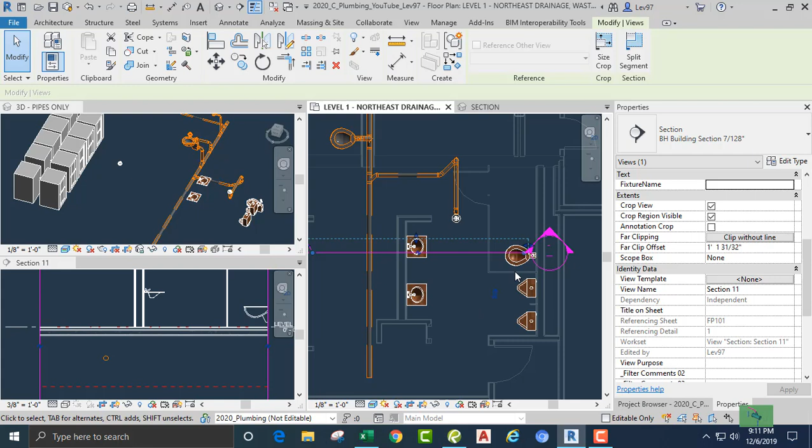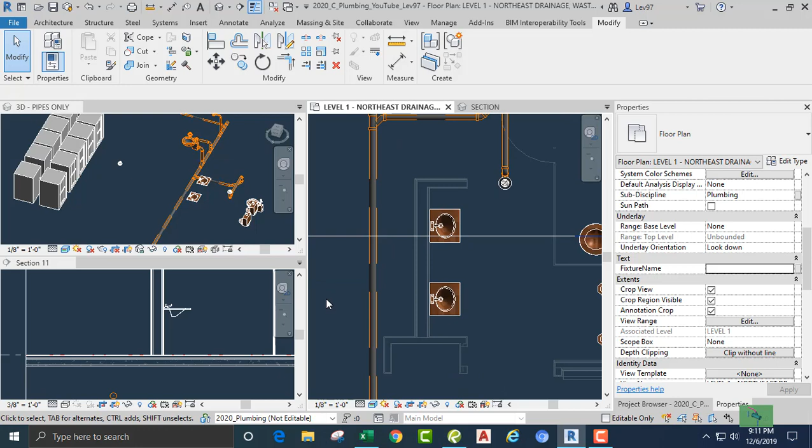Okay, let's get started piping up some plumbing fixtures again. These two lavatories, this water closet, and these two urinals. Okay, so let's get started. So what I want to do is connect this lavatory with this lavatory and combine the two to connect into that 4-inch sanitary. I was going to call it a main, but it's not a main. It's a 4-inch sanitary pipe.

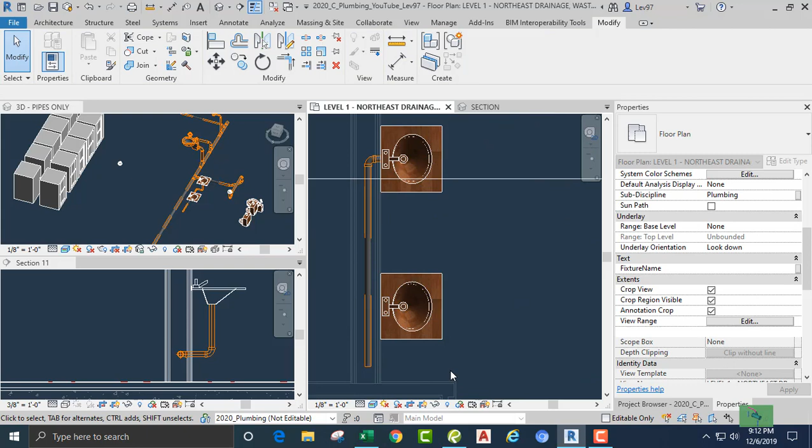So let's go look at our section view, and we can just kind of go down and make sure that it's not sloping. Okay, everything is not sloping, and there. Okay, so when I come around to get my other lavatory, I can align with this pipe. Once I come off my fixtures, you'll see, if you can see the hidden line or the dashed line. Okay.

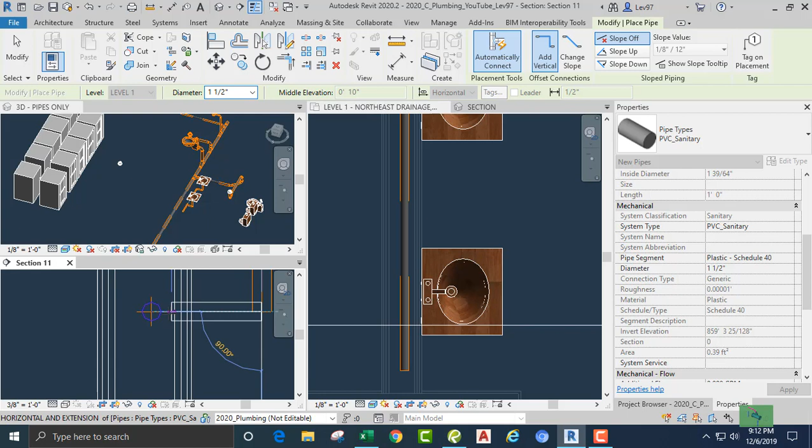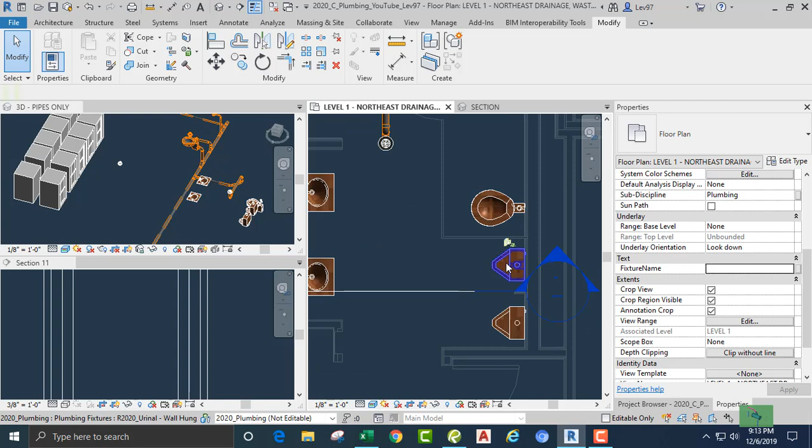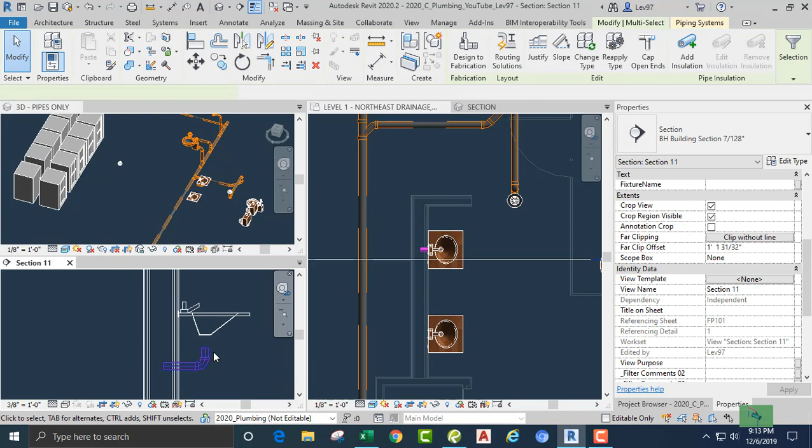Now let's erase this, because that was low, and I'm gonna show you why when you're connecting two lavatories or, say, these two urinals, you don't want to make it too high, because if you make it high, then it won't be able to align. I'll show you what I'm talking about. Okay, let's suppose that this guy is here, right? Put a P-trap. Oh, okay, let's do this again. So down, that's good. Here and here with a P-trap.

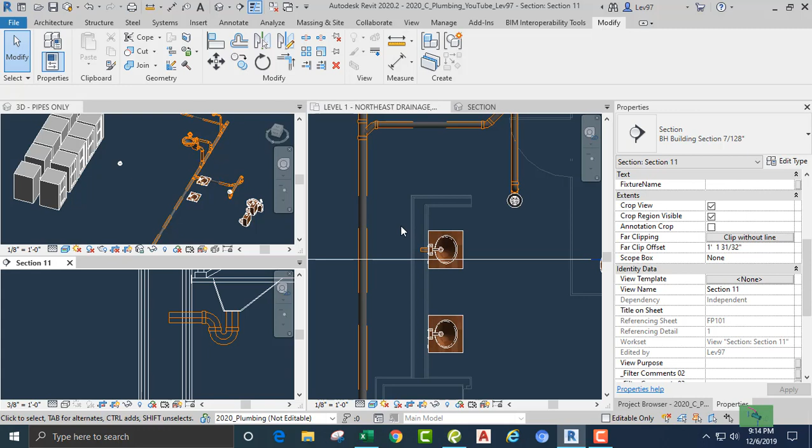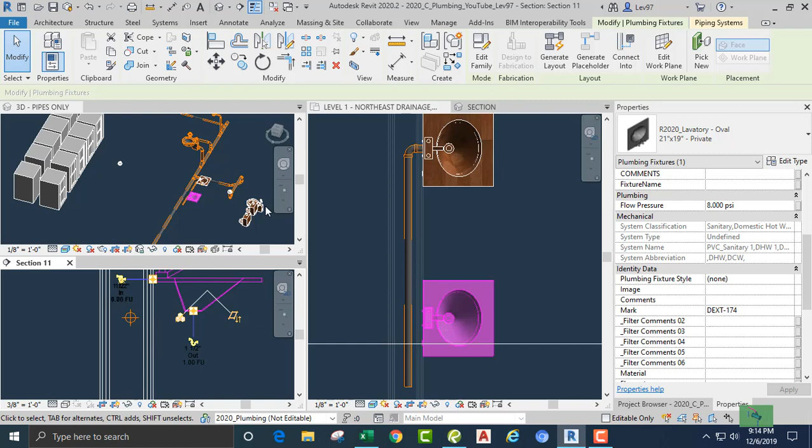Okay, and let's scoot that pipe up, and now that it's high, or higher, you're gonna see that it's always good to bring them in low, because there's no way to align this pipe coming off the fixture with this pipe coming off the first lavatory. Okay, so that's why, when you're doing that, you want to make sure your pipe is lower, so you can get a good connection or alignment. Okay, let's go here.

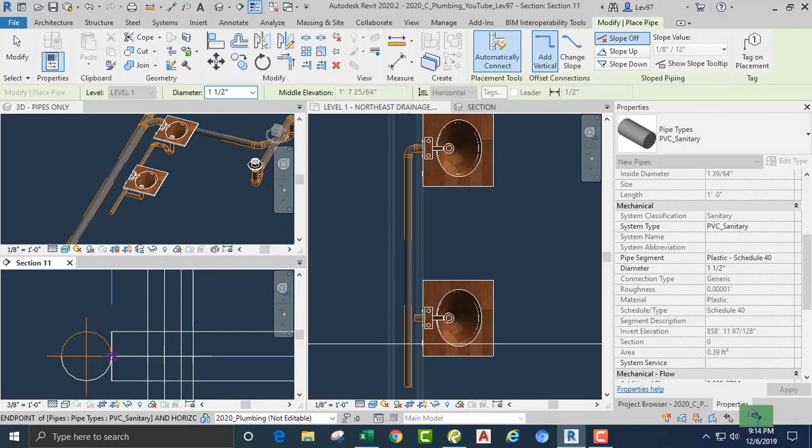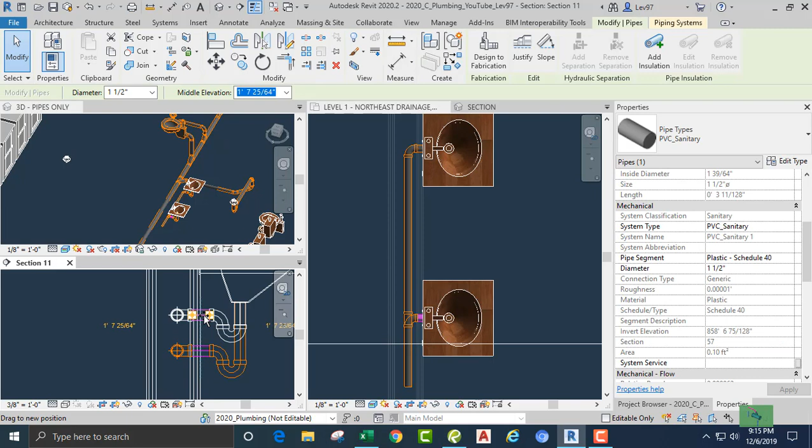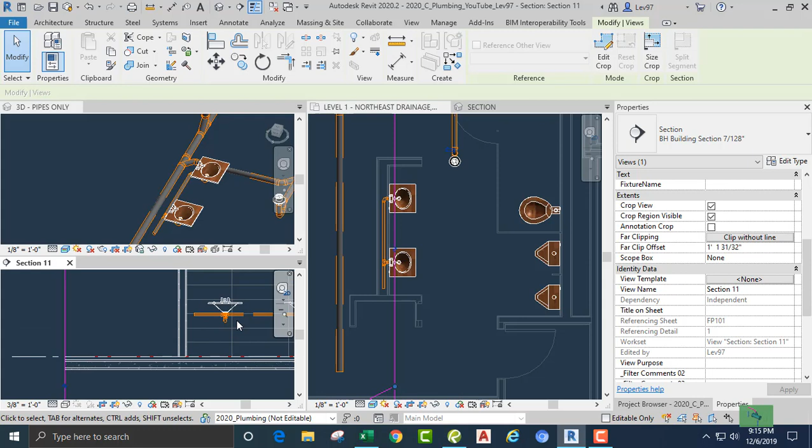Okay, and now we can go up higher. Let's put a P-trap in here, and P-trap. Okay, so we go up, and let's leave it at that. Okay, so now what we need to do is look at the view, a section view looking west, and we go 90. Okay, and going west, I'm gonna go inside the wall. Let's go inside. Okay, so looking at that section, we're gonna go down through the floor, right? No slope, but now we're gonna slope the pipe to the 4-inch sanitary pipe at 1/4 inch. Slope down at 1/4 inch.

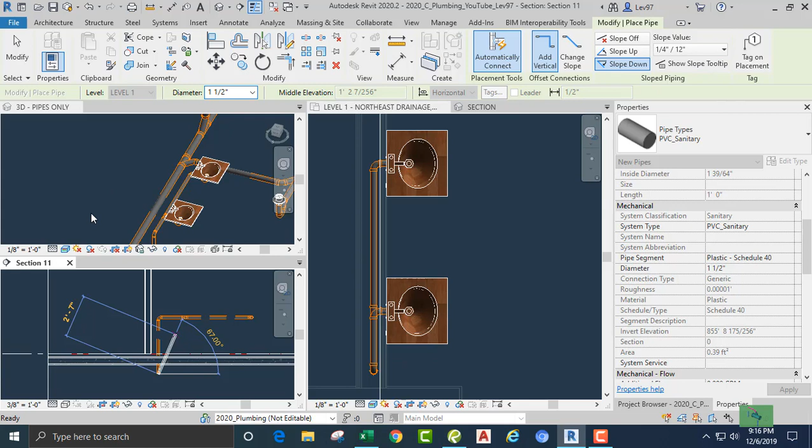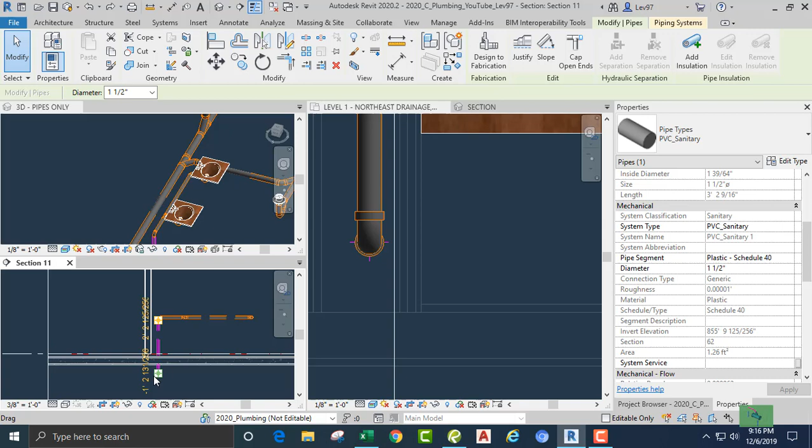Let's go to plan view here, and we're gonna go down at 135. So we are sloping 1/8. See, I forgot to put the slope in, so let's do this. Draw a pipe. Oh, and let's change this to a 2-inch. Okay, that is now a 2-inch pipe, and we're going to slope at 1/4 inch per foot over to the 4-inch sanitary.

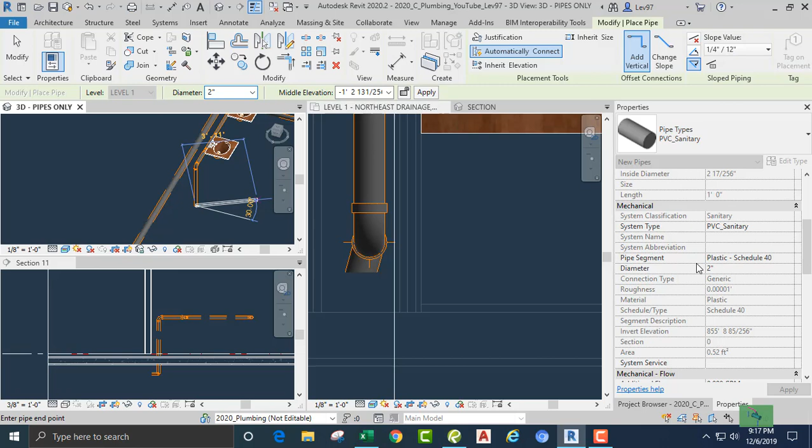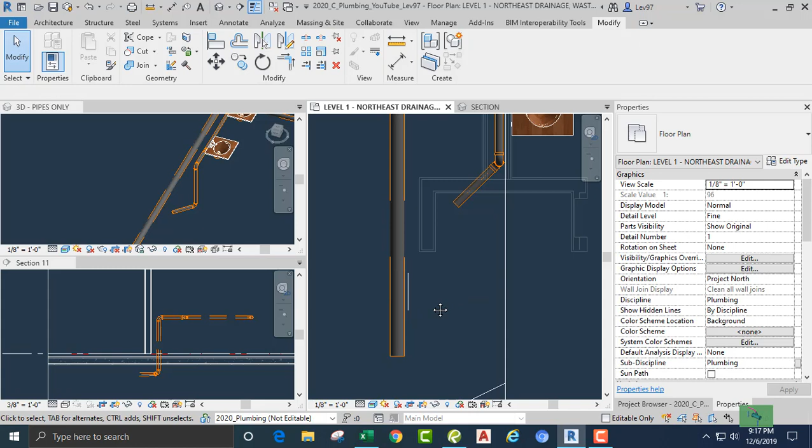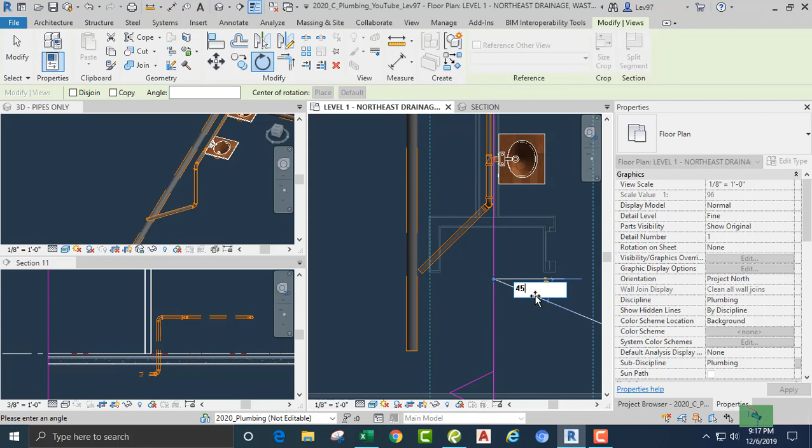Right? So we make the plan view active and come out at 135. So from here, I'm going to detail line. Just type DL as a hotkey and scoot that over a little bit. Extend the pipe close enough to the 4-inch, and let's get our elevation. So I'm going to rotate this view 45 degrees so that it is in line with my section. And here's the section.

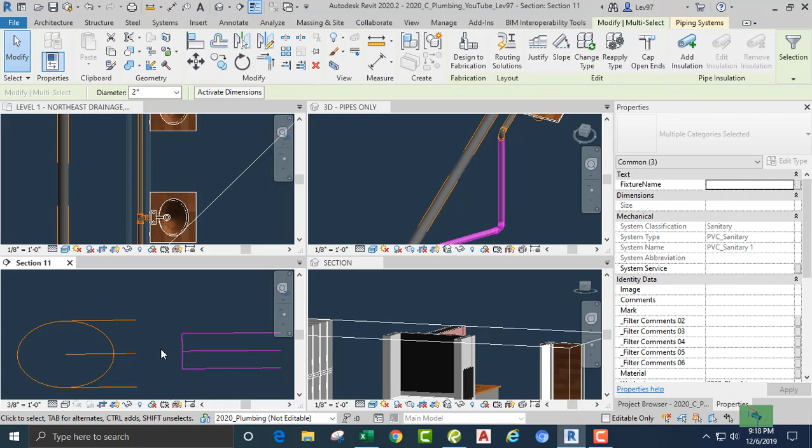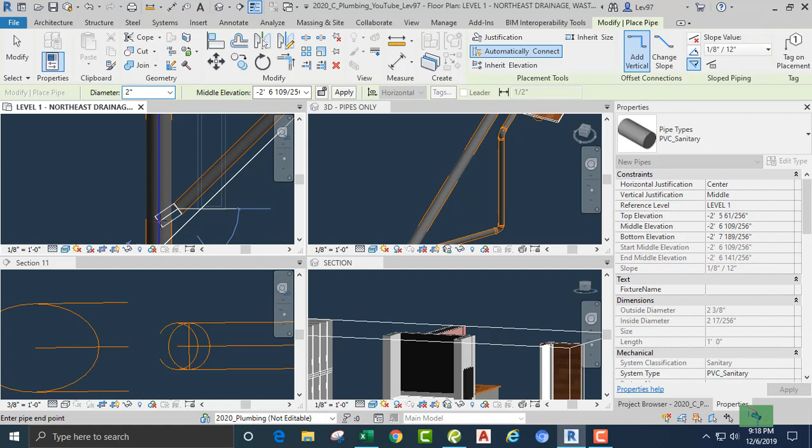So what we're going to need to do is, okay, that's good. And let's eyeball this guy down. We have to bring it down. Okay, and let's eyeball it. So what I'm trying to do, maybe a little bit more. That looks good. Okay, so we go to plan view, and let's see how we're doing. Let's draw a pipe over to about right there. Okay, and that looks good. Looks good.

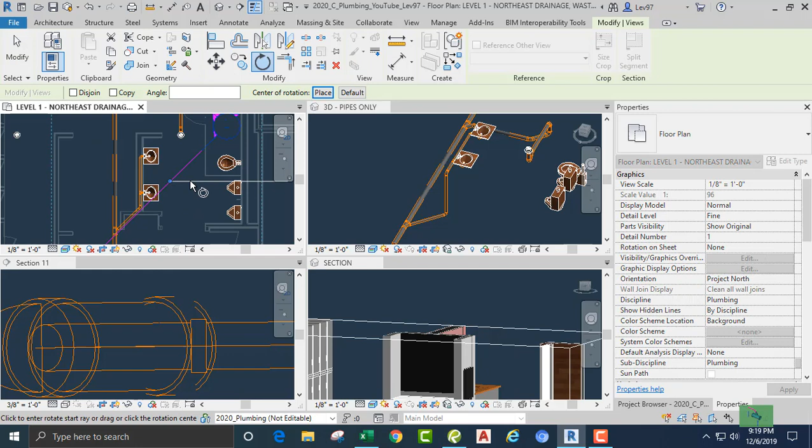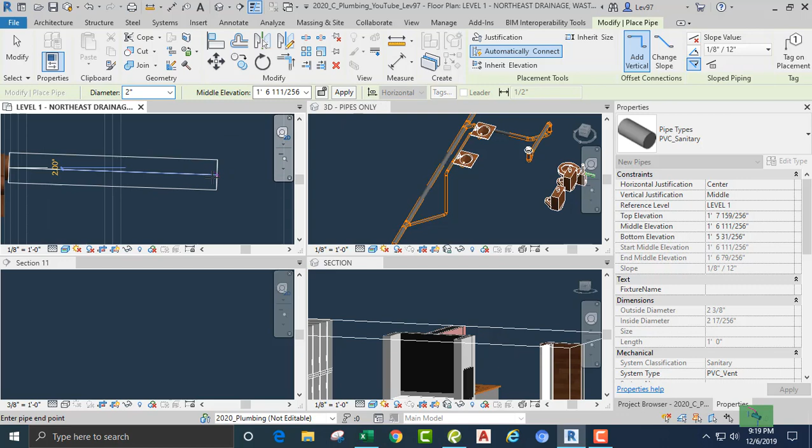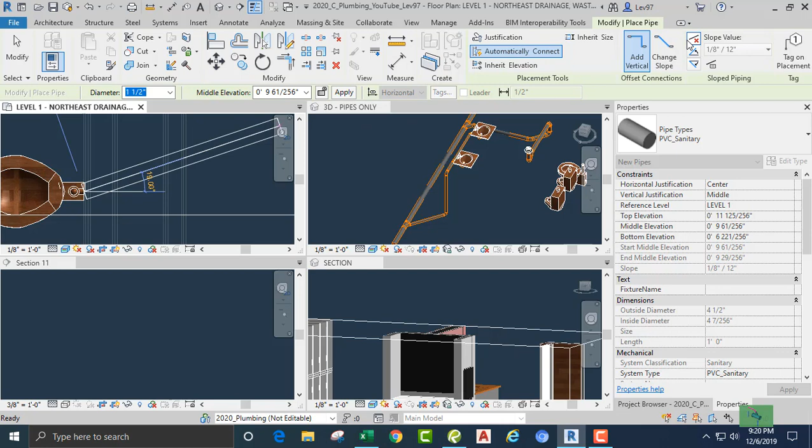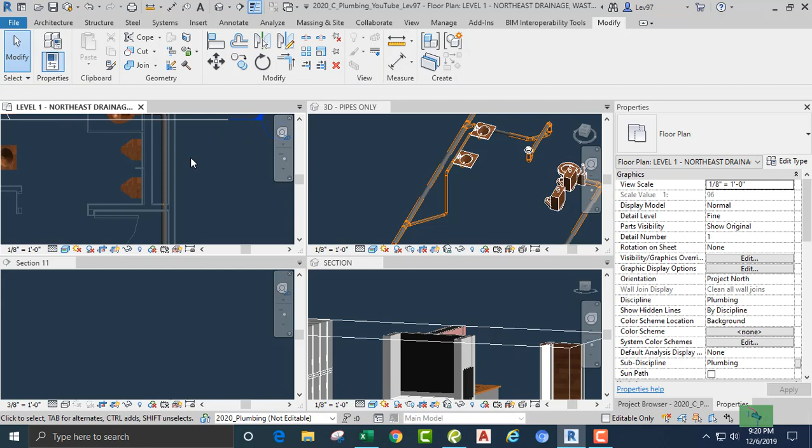Okay, let's rotate 45 degrees here, and let's look at the other fixtures, the water closet and the 2 urinals. Let's see what's going on here. I think that I can, okay, let's try this again. So we are here, and we want the 4-inch round. That defaults to 4 inches. Okay, no slope. And we go here, and let's slope down at 1/8. Okay, let's check 1/8. Okay, and there's probably gonna be a clean out back here.

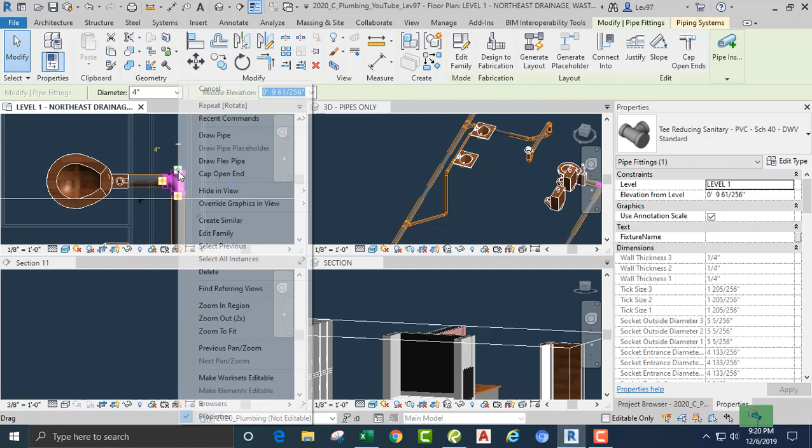Okay, so I am drawing the pipe so that I can cap it, but it keeps giving me an error. No auto route solution was found, right? I wonder what that is. I know what it is. I'm just trying to. Any ideas what that could be?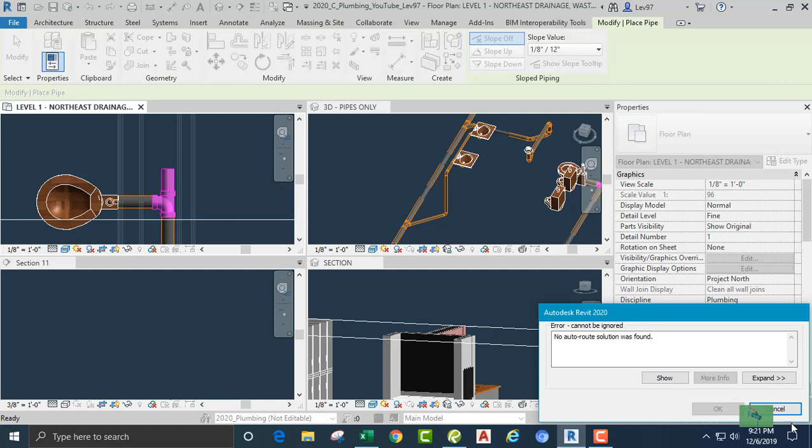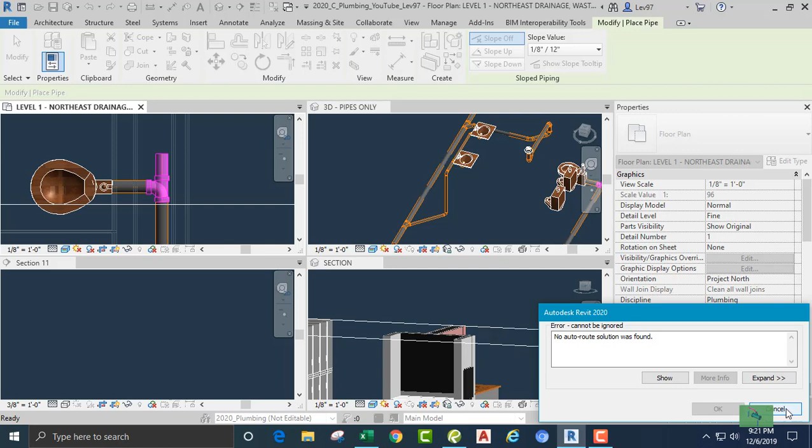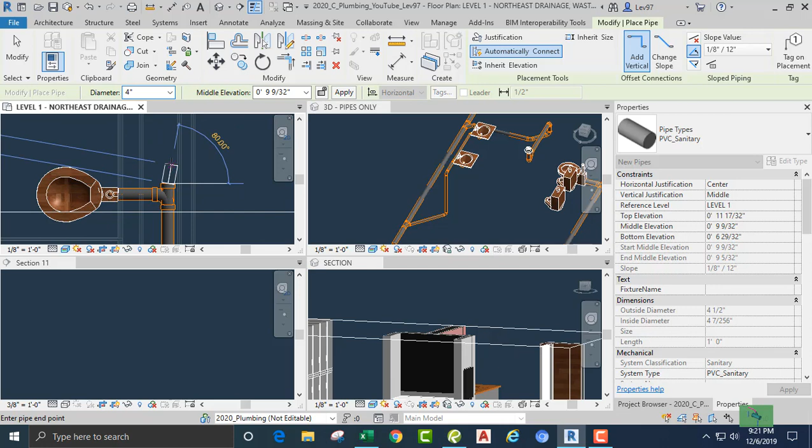So what we do when we see something like this, and what the error is not doing, if I draw a pipe, right? It says no auto route solution was found. What does that mean? I don't know. But the problem is that the pipe is sloping and I'm going the opposite. So I need to change the slope to go up. The error, I think, should say that the sloping pipe is opposite of what it should be or something. But this should be the solution, and then we cap it. So just have to be careful with stuff like that.

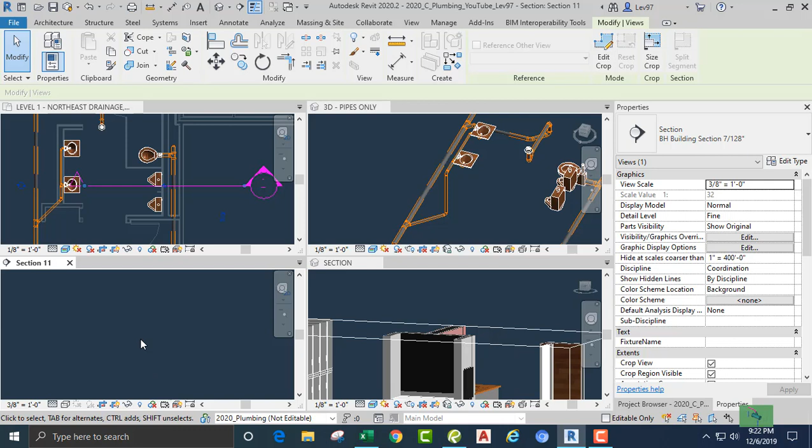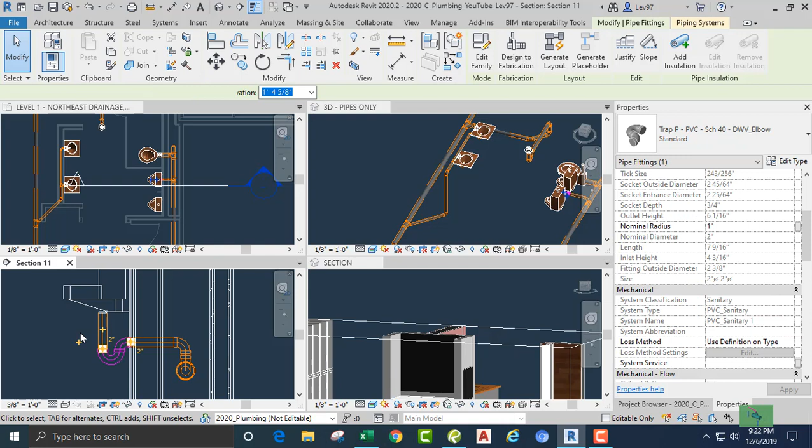Let's see. I'm gonna go over and let's pick up the urinal, section 11, somewhere in here. Okay. 2-inch. Slope is off. Sanitary. Okay. So come down, see, and look at our hidden line, our dash line. Okay. And we have a P-trap coming off the urinal. All right. Now let's pick up our second one.

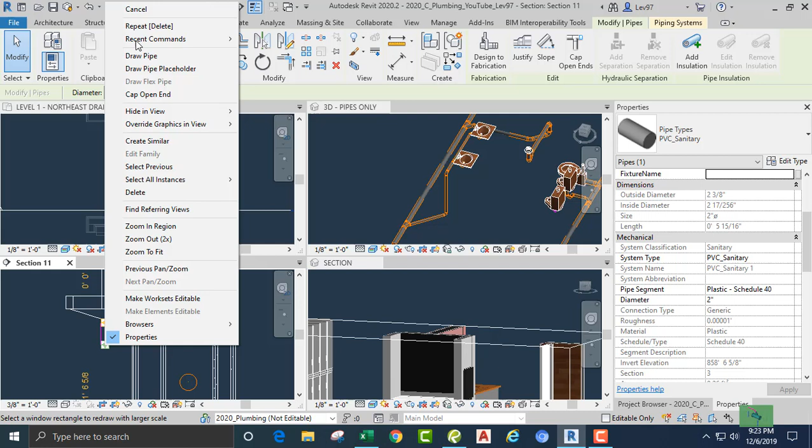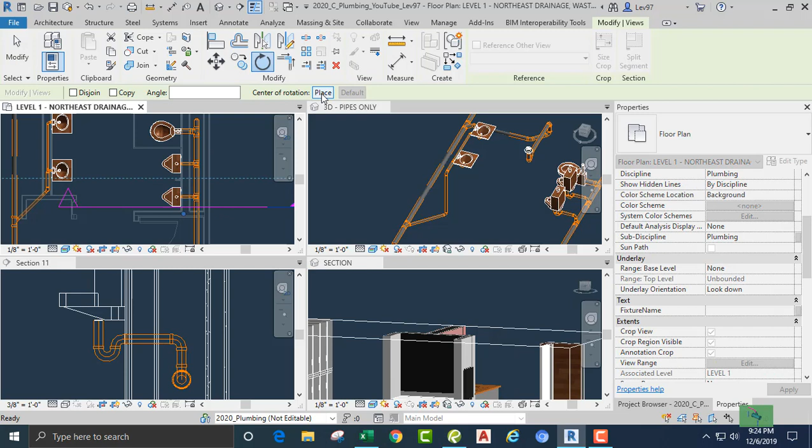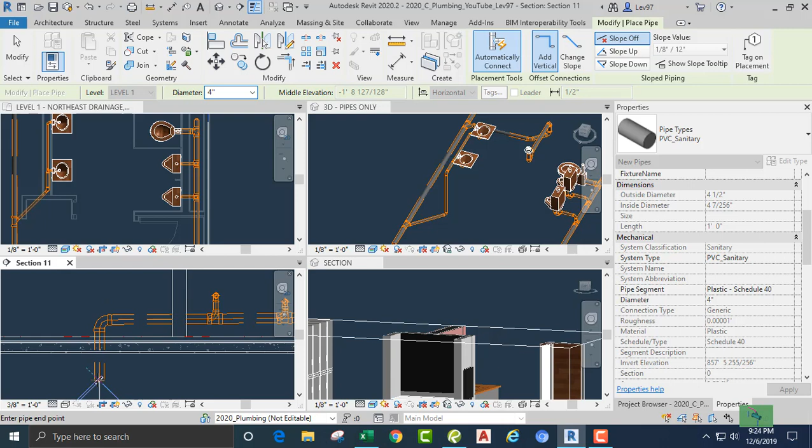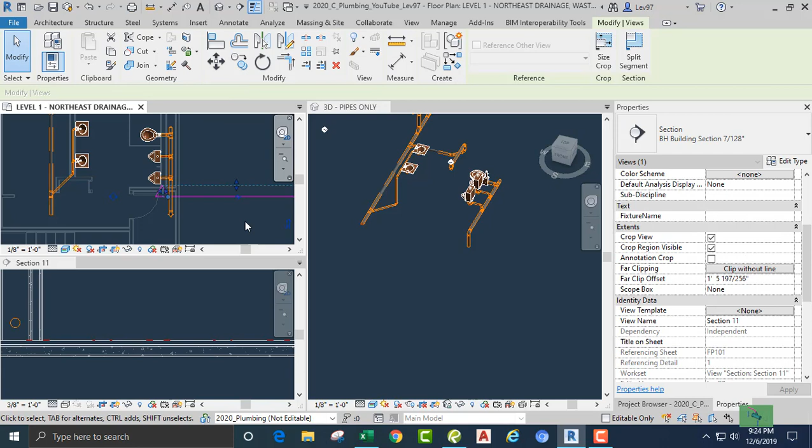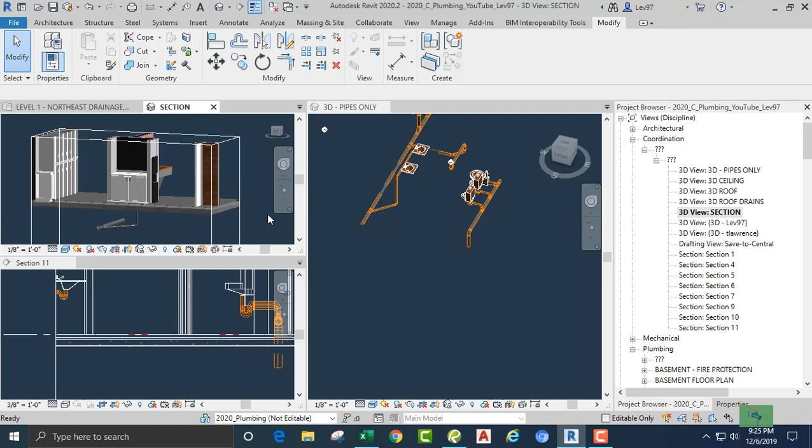Okay. Let's look at a section view. Again, waste. Okay. Now we need to go down. Slope is off. Okay. So. Okay, let's look at something. I just want to show you guys something. Let's rotate 90 degrees. Go over, and let's see if I can get this part. Let's look at that section. This is section 11. So we go to that section. And what we can do, right click on the cube, orient to view, section 11, right? And that should be it.

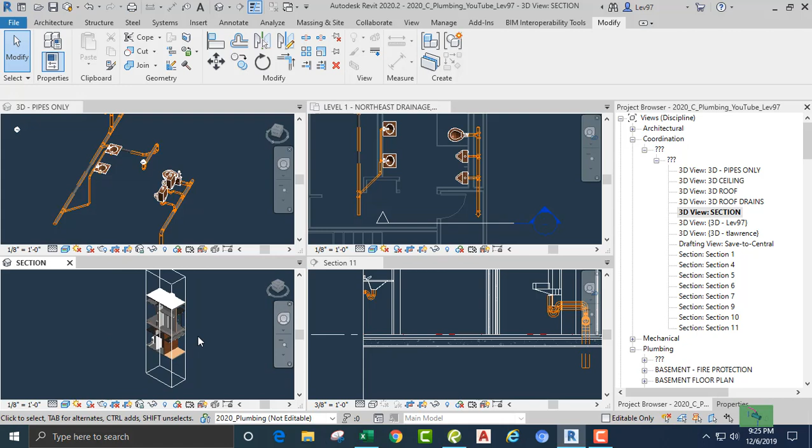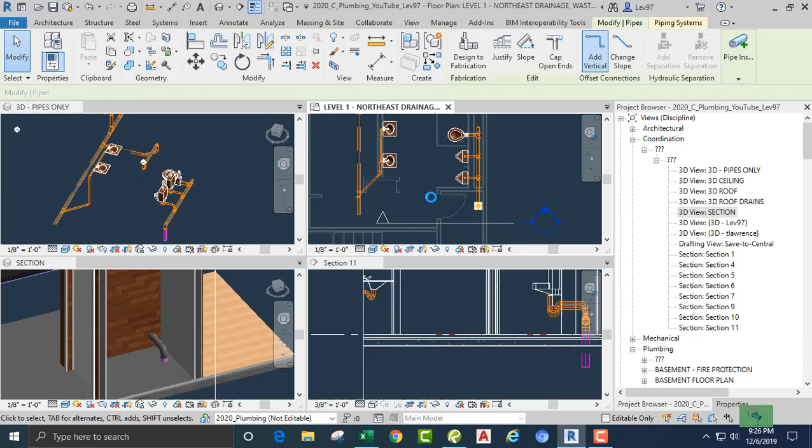Okay, so we can see this pipe. You see how it's coming out in the room? There's the floor, right? So you know that there's a problem if it's coming out like that. So what we can do is go back. Let's go back so that it disappears from the wall. Okay, and it goes down. So that looks good. And what we need to do is from here, let's see how far down into the floor it is.

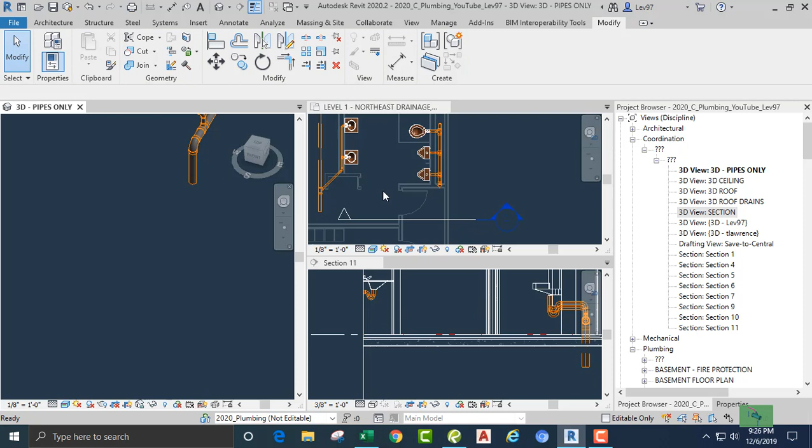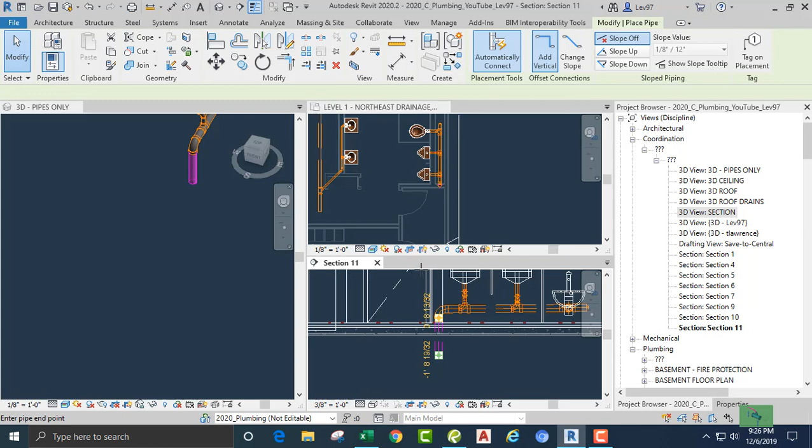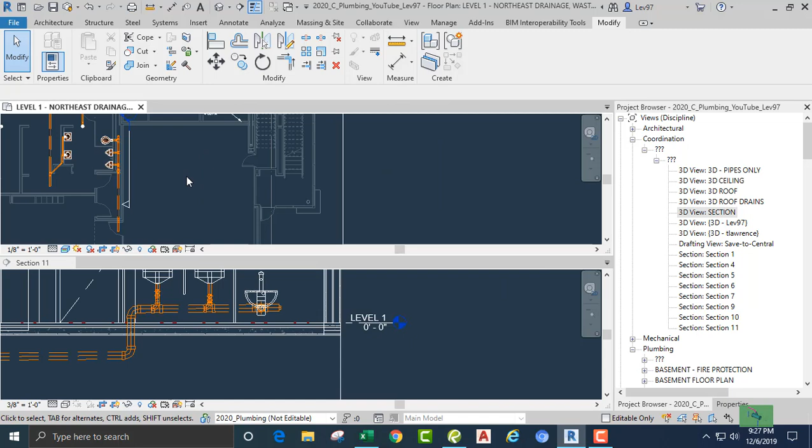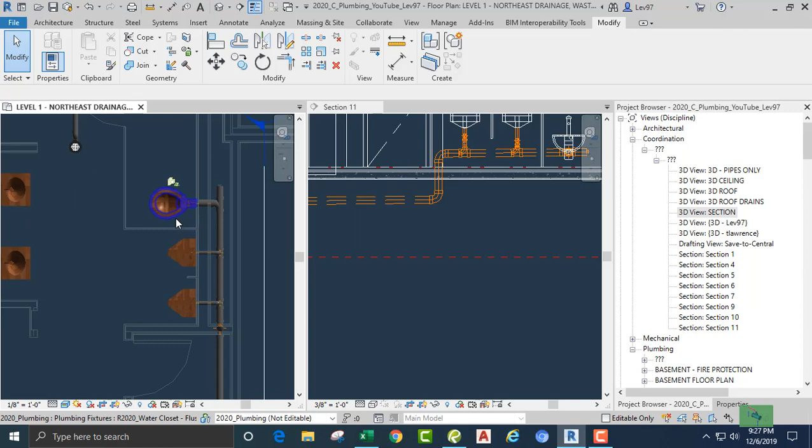Okay, let's rotate our view so that we're looking west. Okay, here. Okay, so we have enough. And we can slope down at 1/8, right? Like that. Okay. So what we have, we connected these two lavatories into this 4-inch pipe, and one water closet and 2 urinals connected to a pipe coming off of the wall mounted water closet.

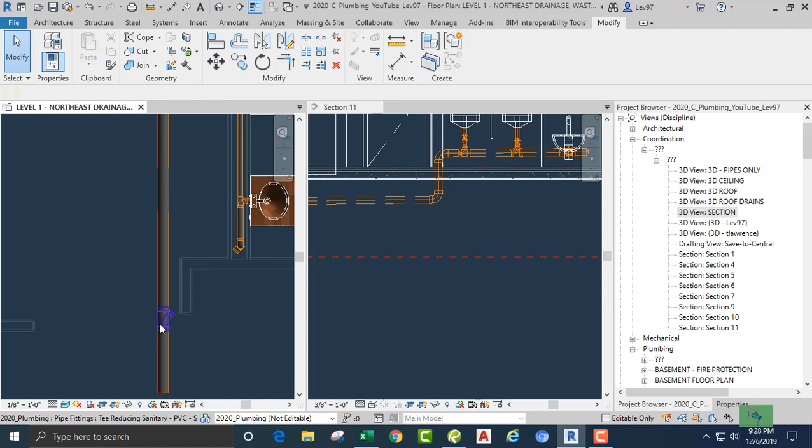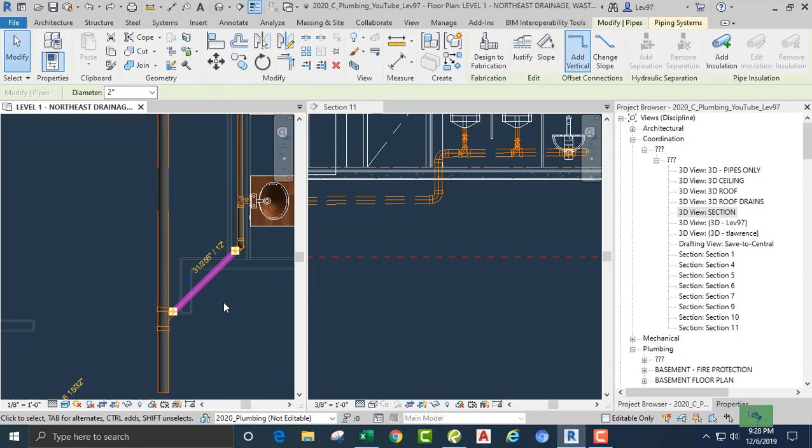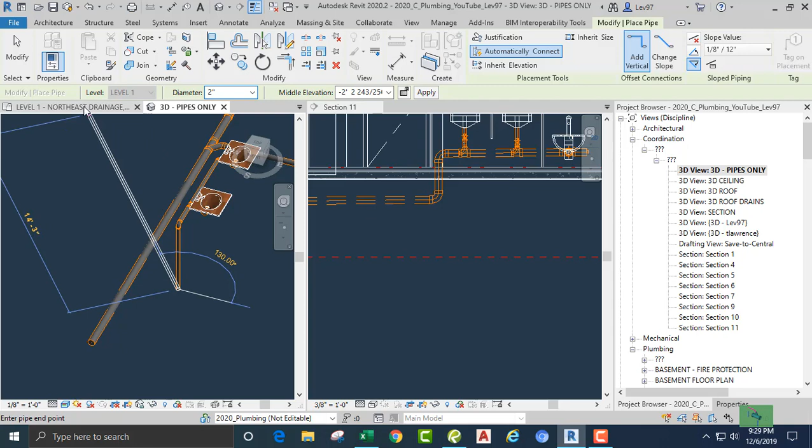Okay, so there's other ways we can do this. I might show something. Say, for example, here we could have, let's erase this. Okay, and you can erase a fitting by clicking this minus, without breaking the pipe, right? Because if you erase here, watch it be clean. Oh, okay. So, but you have to erase the pipe and leave the fitting so that you can look at the subtraction. So it subtracts that out. Okay, so we can 3D view. What we could have done was go straight into the 4-inch, right, from here, and go down at 1/8 inch. Yeah, here. Okay, could have done that.

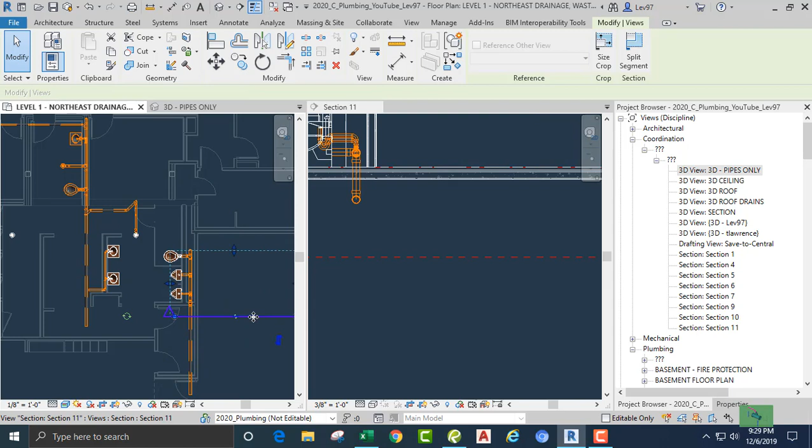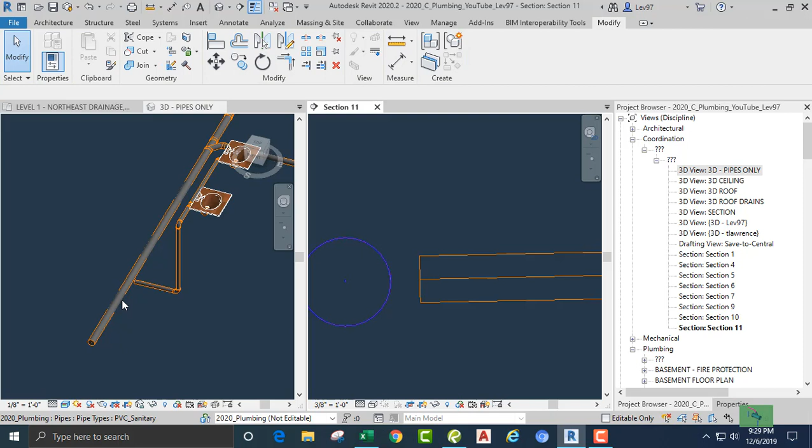Now let's look at that section. Rotate here and 90. Come over there. Let's look at that. That's not too bad. And we can eyeball it. I like to get all of it. I guess we can make it a little closer. Let's see. I'm going shift. That's not bad. Okay. So, and extend. Oh, what did I do? What happened? Extend. Okay. Let's try this. It's not going to give it to me. I'm going to bring that out. Oh, okay. Just a little closer. Let's see if... no, never mind.

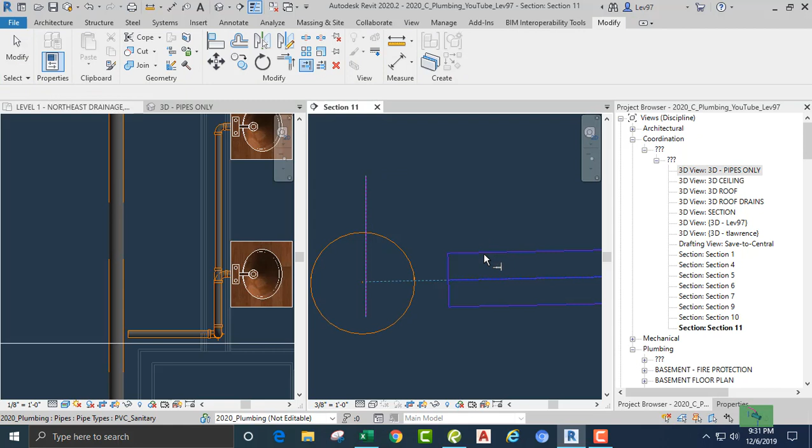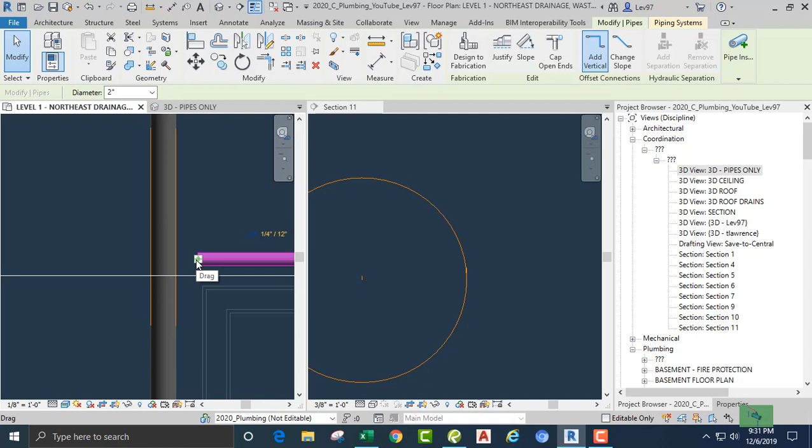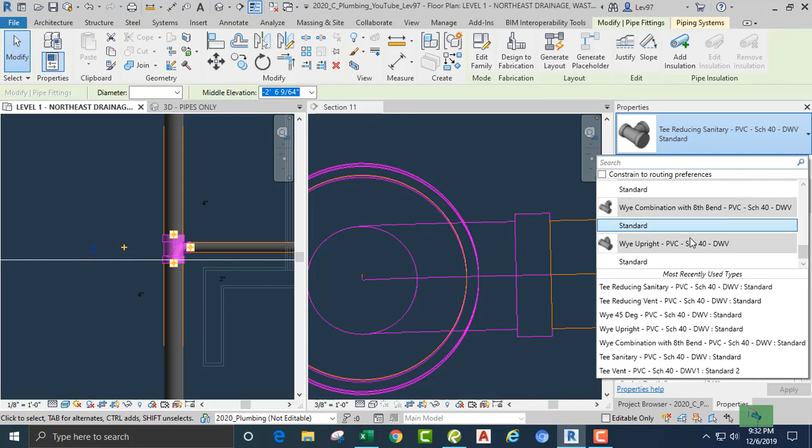Okay, let's see. What I can do is do a detail line here. And now we can extend it. Okay. And delete. That looks good. So we come back. Detail line here. And trim that out. Delete. And drag. So you see the blue line. Okay. Now this one, the line is too short. What? Properties, let's see. Combination, yeah, we like that. Okay. Okay, so that looks like it's about done.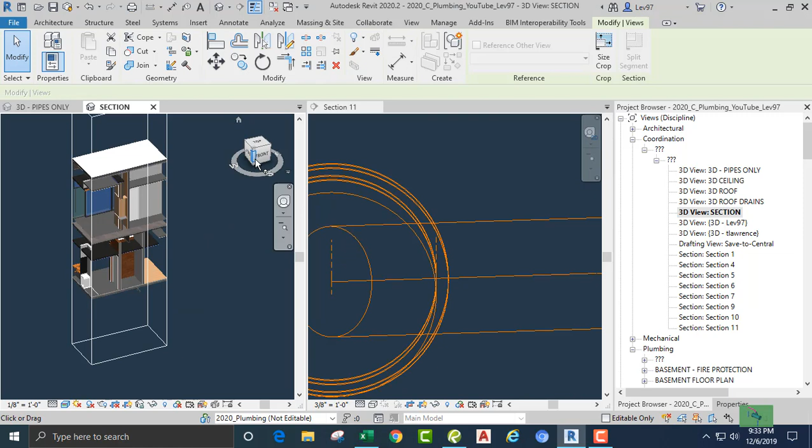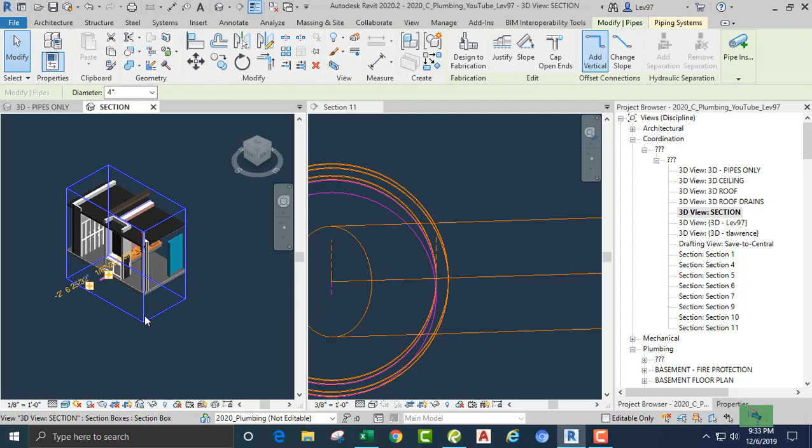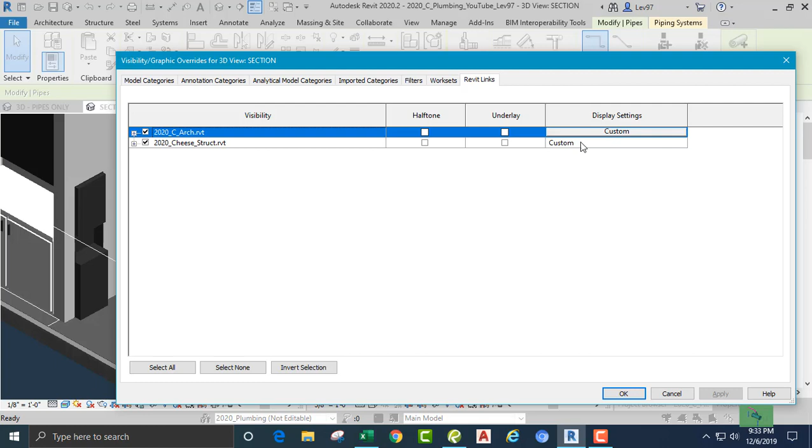Let's look at this. Orient to view, section 11, right? Okay. Now let's look at the perspective and bring these grips down. And let's bring this grip up so that we can see. That's the pipe. Okay, it's well below the floor, and that's okay. And all the pipe is in the wall space. Okay. Where's the fixtures? Okay, so these fixtures. Let's look at the link view and go to the architect, right? And usually it's on a casework. It's casework here. So we can see our fixtures. Okay. So there. Okay, so that looks good.

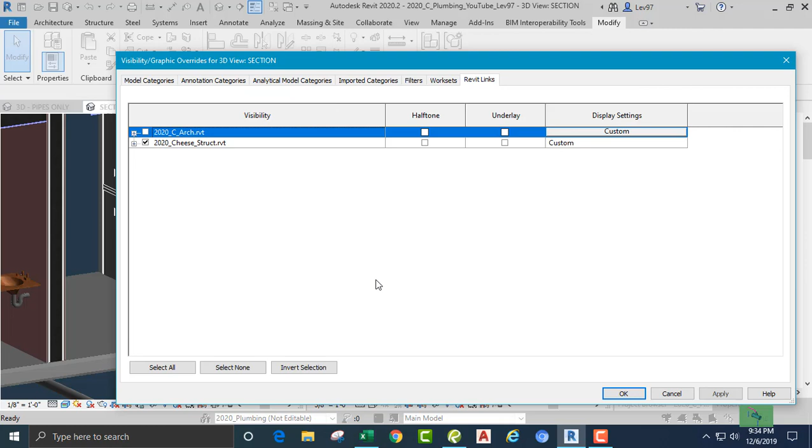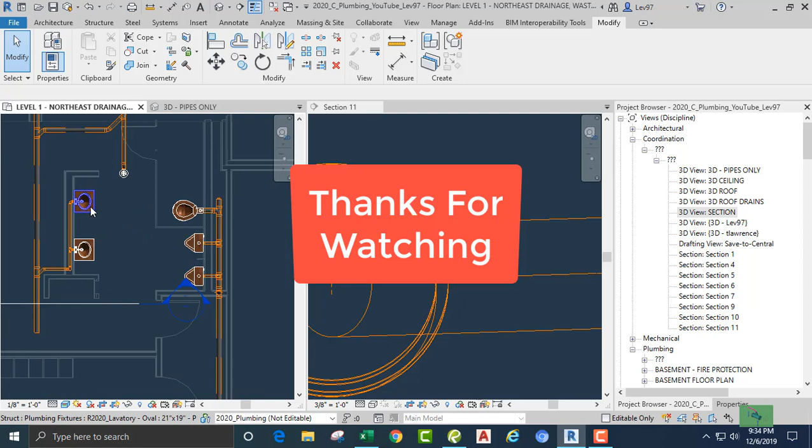And if we, let's just unload. Okay. That looks okay, so it's going through the floor. We're okay with that. Okay. Well, let's go back to the floor plan. Okay, so that's the 2 lavatories, 1 water closet, and the 2 urinals.